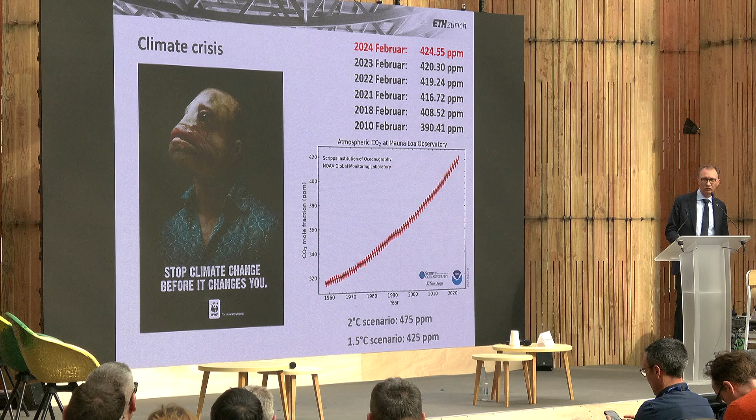But I would like to start with the same slide as Andrew showed previously, and Jose, because this slide is always my first slide. I update this slide every year, so next week I can update again. And if you look at the number, we already reached the 1.5 scenario. I'm sorry to tell you, but this is the truth.

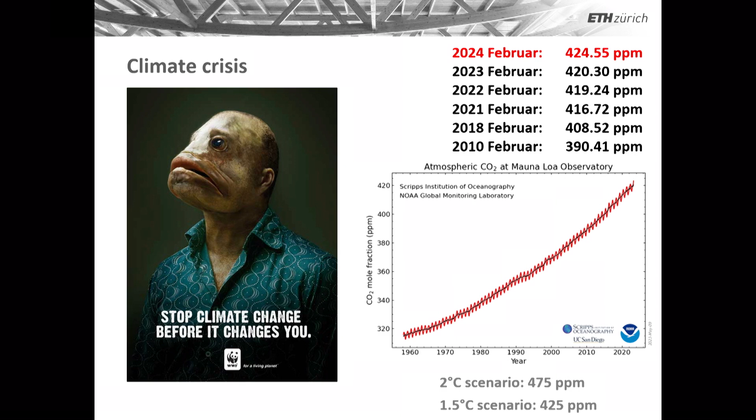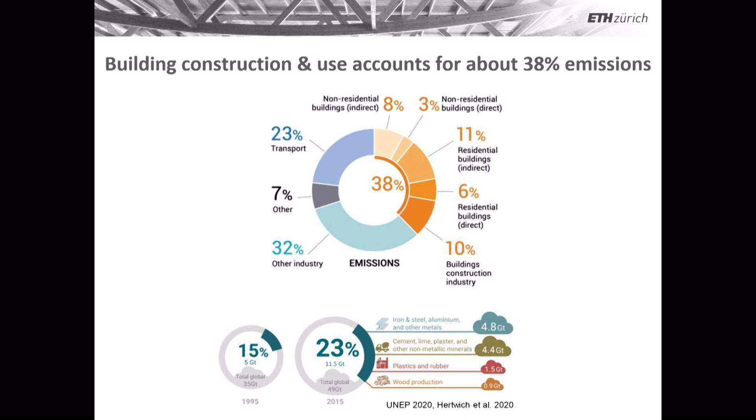You have already seen previously that worldwide, building use and building construction account for 40% of emissions. So we have to work in this sector. And as Andrew showed again, we can do something good if we start replacing concrete and steel with timber. But we have to upscale timber construction.

This is a very nice study done by Built by Nature. We can have a huge impact, but we have to do more with timber. I will not address this point.

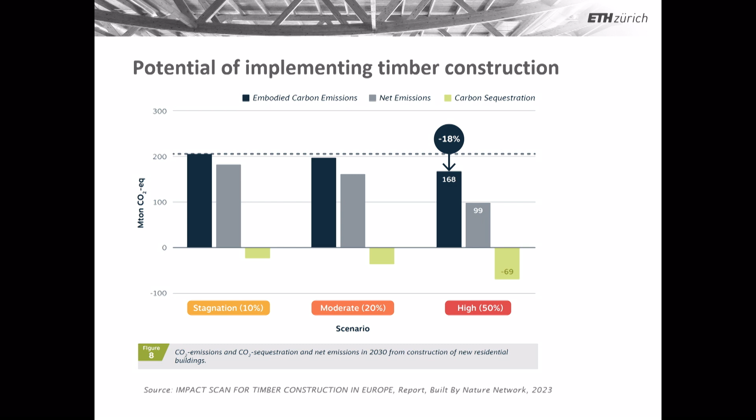Then, of course, if we want to build with more timber, there is the issue with fire. I agree, timber is a combustible material. We built cities for centuries with timber. They have been destroyed. I'm very sorry to say, Los Angeles has nothing to do with it.

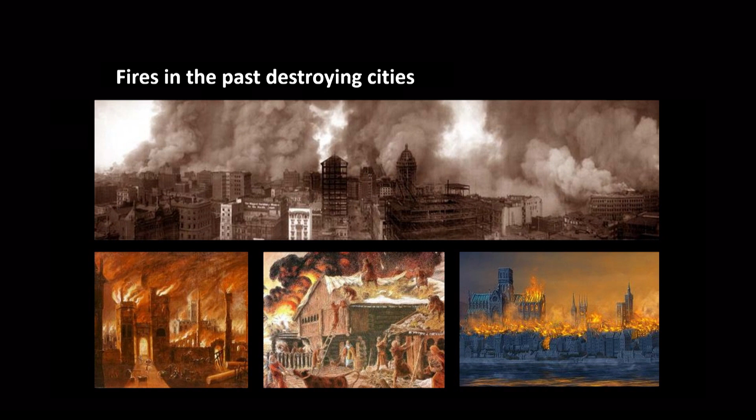You are completely wrong. If you rebuild Los Angeles with concrete and there is a wildfire, you will destroy all buildings again. But I don't want to discuss this point, it's just to clarify a few things.

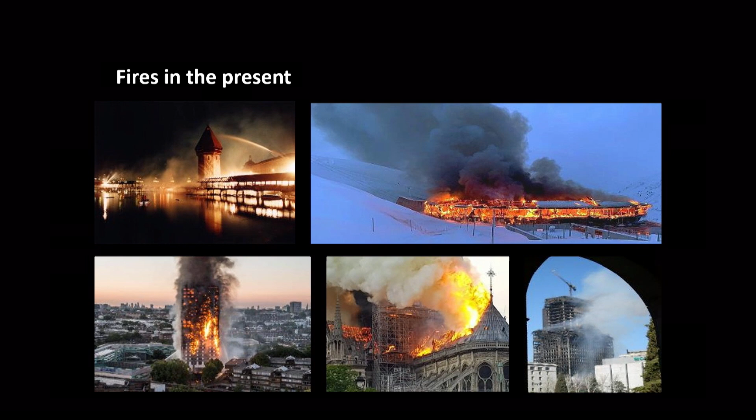Of course, we have also seen fire in recent times. We still have some fires, but we have a lot of new knowledge to take care about this. And as you are doing, and congratulations, what you are doing in France is the right way to go through all these critical points. We have many critical points, and Andrew, what you show me is the right way to address the point and propose solutions.

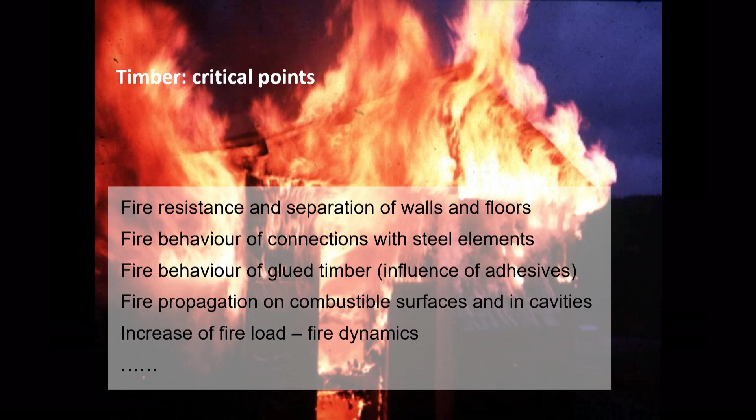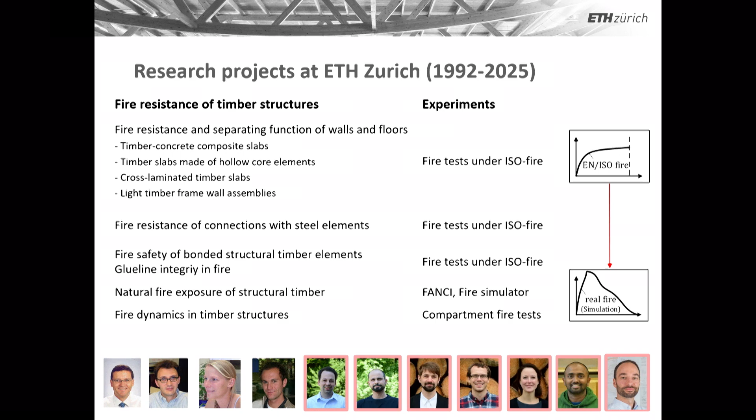And what we have done in the last 30 years, of course, is doing fire-resistance tests, normal fire-resistance tests, compartment fire-resistance tests. We have to understand, I hope, your dear French colleagues can go back also to this work. I don't want to say you are repeating what you have done. It is important, everyone needs to get this knowledge.

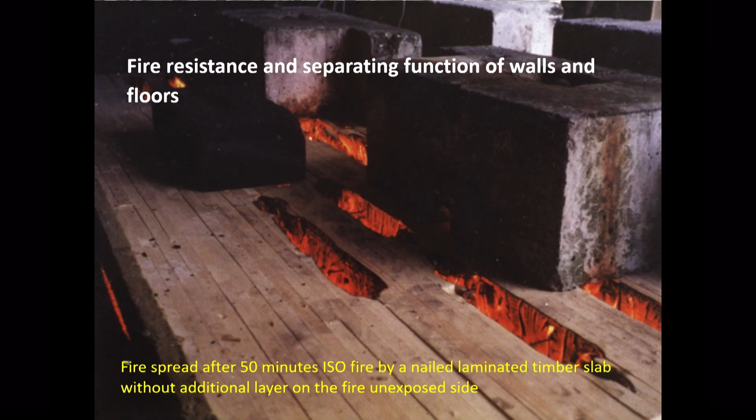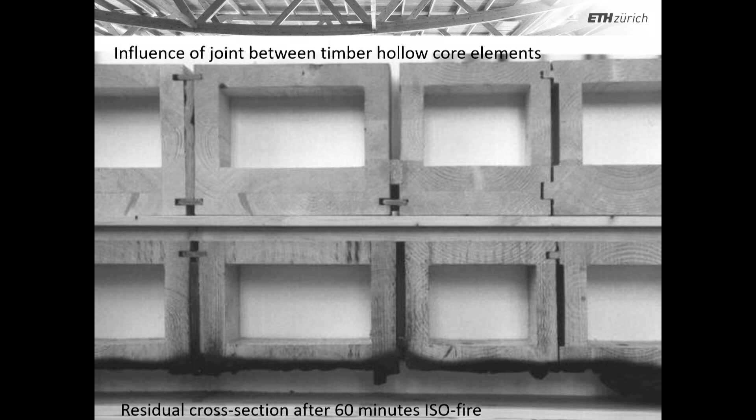And it's not only fire resistance, it's separating function, it's detailing. Detailing should work. Fire is like water, it always finds a way to spread out if you are doing the wrong detailing.

We have been working with all materials, not only timber, also concrete. Now we have clay. It's very interesting to see how we combine timber with other materials. We have to recognize we need hybrid buildings, and probably it's the right way to go.

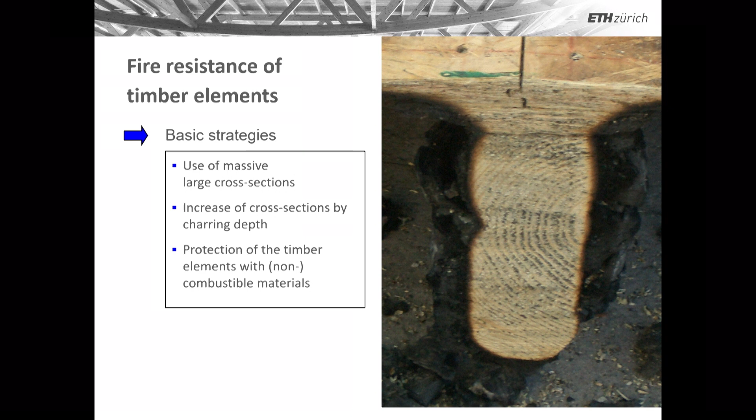But we know now, fire resistance is not the problem. It was mentioned, make the cross-section big, and you have good fire resistance. About cavities, detailing, gaps, and so on, you should take care. You should do this detailing in the right way, otherwise you have a problem.

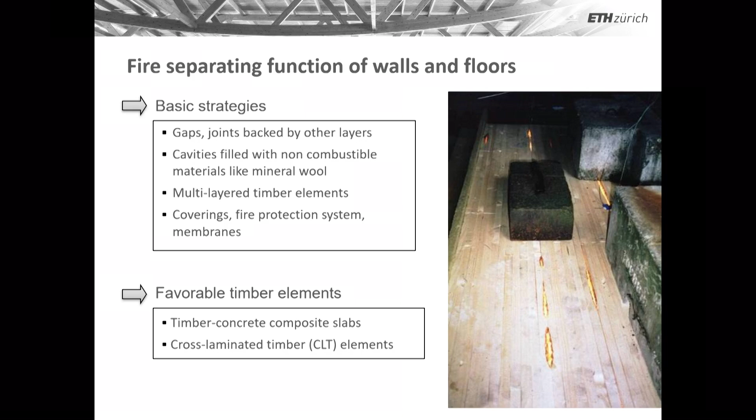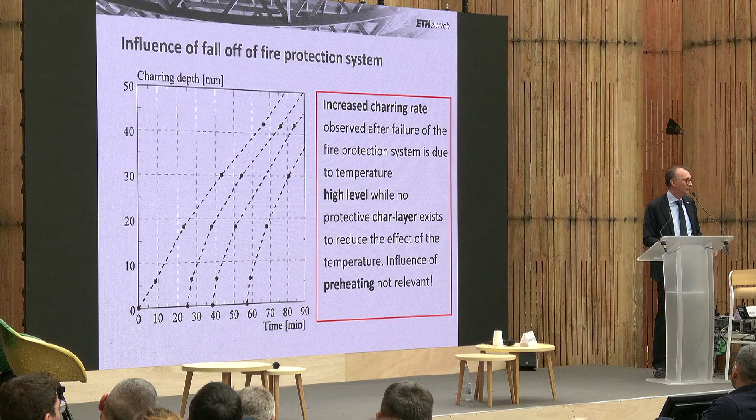We are now protecting timber with gypsum plasterboard. We can discuss if this is a good or bad idea. Sometimes you want to protect with gypsum plasterboard. You have to consider what happens when the gypsum plasterboard falls off. We have an increased charring rate. We need a new charring model to consider this situation, and we have this knowledge.

CLT is the most tested product worldwide. Please don't burn any more CLT, we have thousands and thousands of fire tests. We know how CLT behaves in case of fire, and this was important. It's still a young new product.

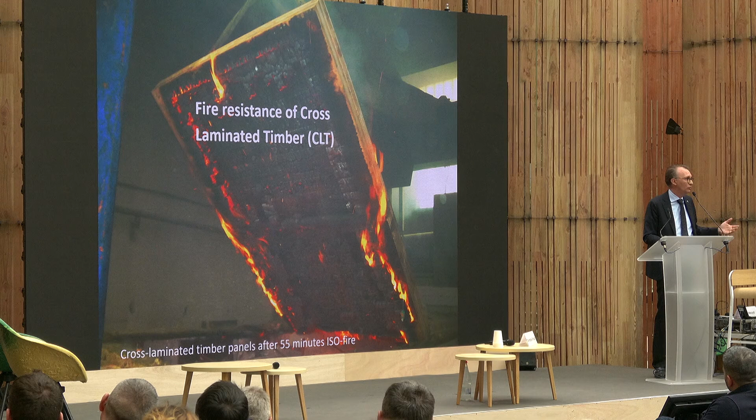And we discovered many years ago there is falling off of the char layer, not only of fire protection. And this causes maybe a second flashover. This causes a problem.

We have to consider this problem. Can you start a movie?

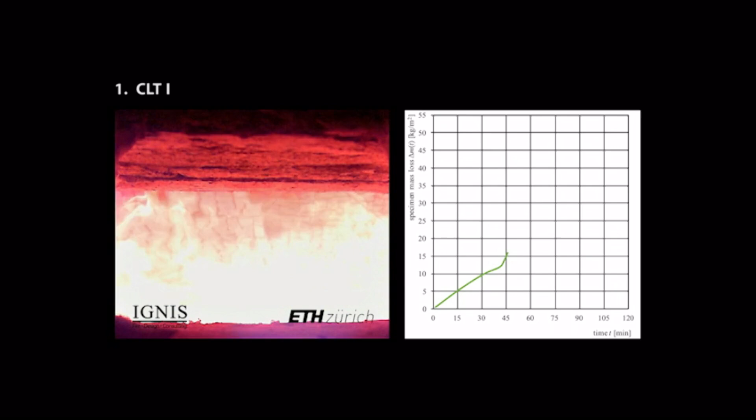Every time that you lose the char layer, the timber underneath ignites immediately. It's not protected anymore from the char layer, and it burns faster. We have a double charring rate. You see in this video, and of course, if there is no falling off of the char layer, CLT behaves like a solid timber panel, so no problem.

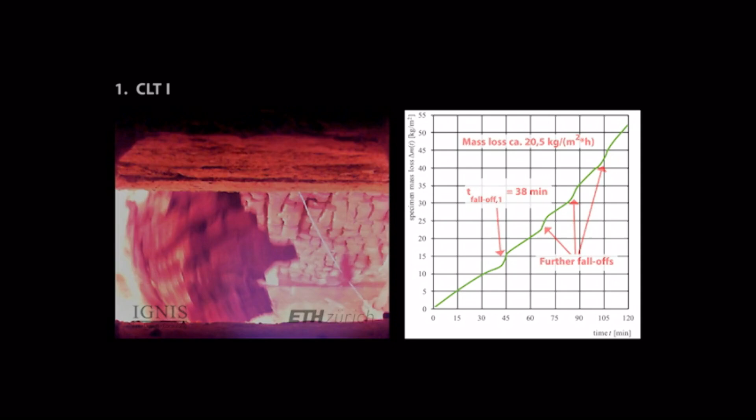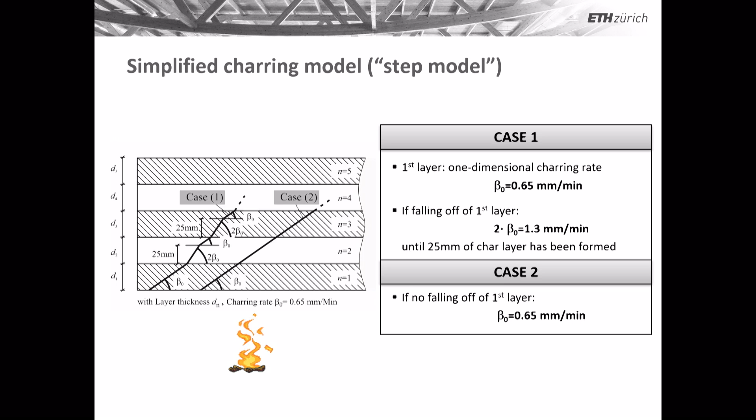But we should also recognize the problem, and then we should propose a solution. The solution is very simple: we use the same model as we are using for the protection system. When the protection system falls off, we have increased charring rate. If we are losing the char layer, we have a double charring rate. So we have proposed the step model, and the step model recognizes the problem, so engineers can consider it.

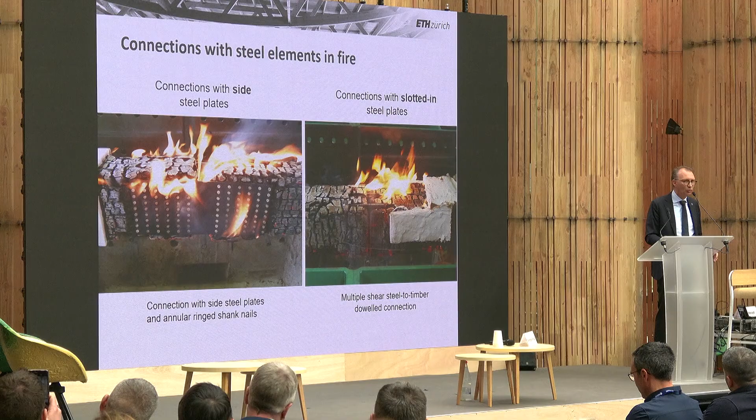In design, there is no timber structure without connections, and we have to be sure that the connection works also in case of fire. I have to say thanks very much, especially to friends at CSTB, to Dhionis Dhima. They have done so many tests in the last 30 years that we now have much better knowledge about the fire behavior of connections, which is important. We know that if we expose steel, it's not good. Slotting steel plates is probably the right way to go, and to protect the steel with timber.

There are other problems, but we cannot address all problems in this short presentation. With timber, what you are doing is amazing - we are going larger, we are going higher. We should recognize a single family house is not like a tall timber building. Maybe a tall timber building should be designed in a different way, should be designed for burnout. We should consider that we are doing something different than what we have done in the past.

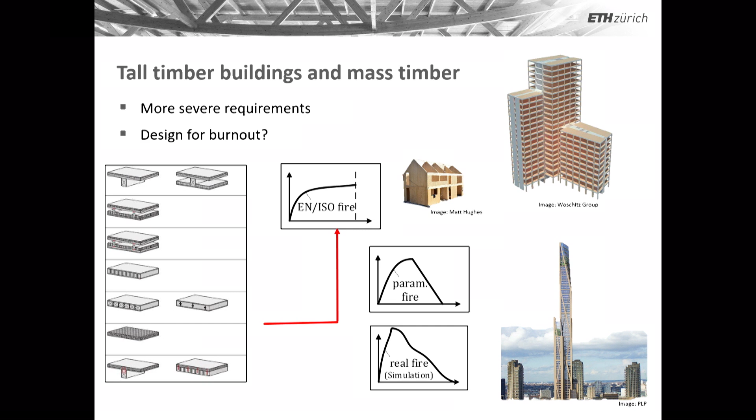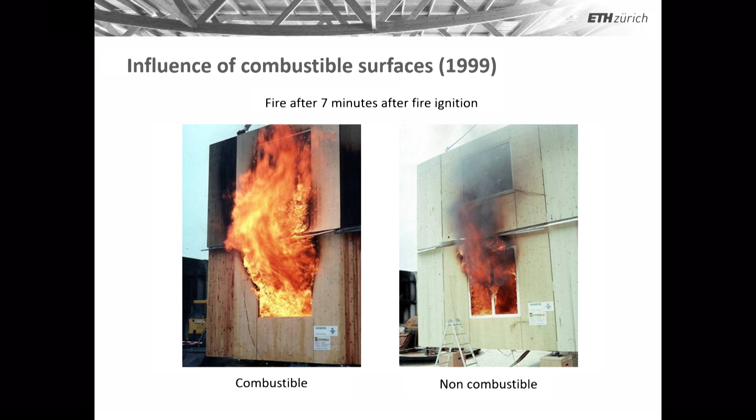In this area, 20 years ago, we did this compartment fire test, already showing that when you have a module completely made of wood, you have a different fire dynamics compared to a module which is completely protected by gypsum plasterboard. We have to consider this aspect too.

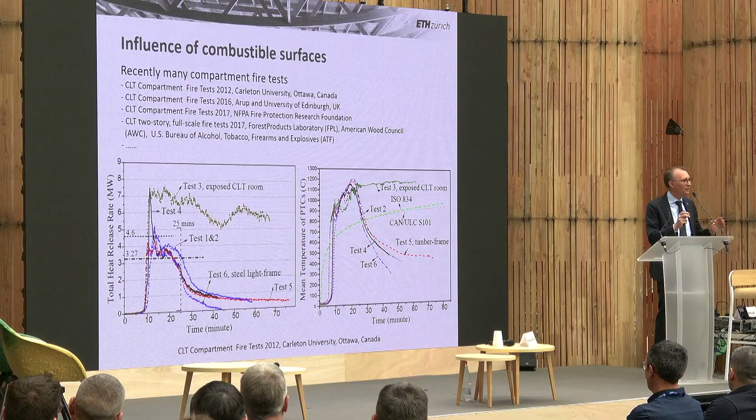In the last 10 to 15 years, so many compartment fire tests in the United States, Canada, France, UK - very, very good. We are getting much more understanding and knowledge. Now we have to translate this into standardization so that engineers can calculate.

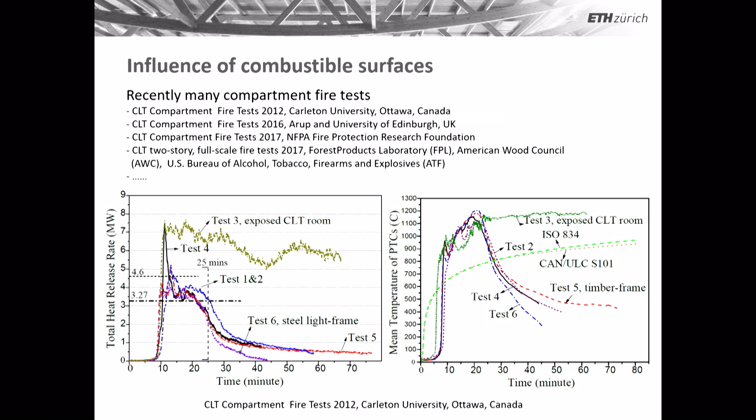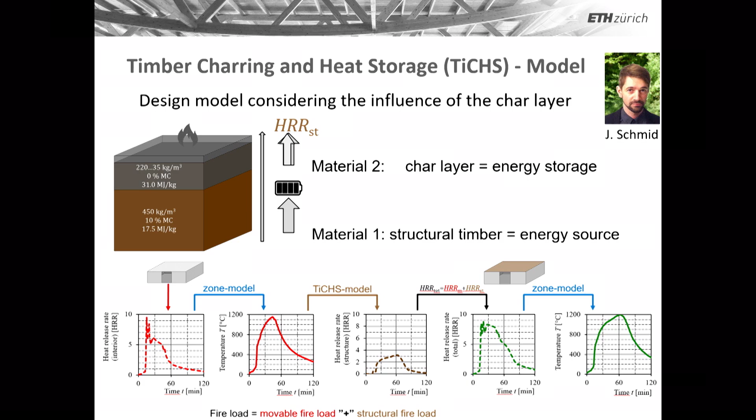At ETH, I see the author, Joachim Schmid, with his PhD. We now have a model which allows us to consider wood as an additional fuel load, but there are other models developed now that we can start using to design timber exposed to a natural fire, not only to the standard fire.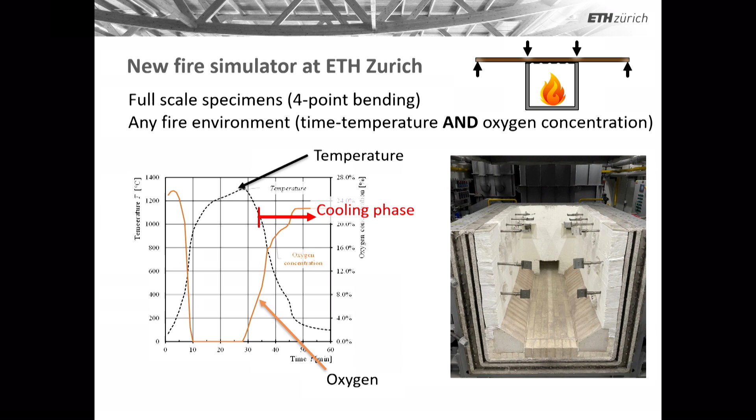The new fire simulator is small but very powerful. In our new fire simulator, we can simulate any kind of fire and environment, meaning not only the temperature but also the oxygen. You see in the graph, we can adjust the temperature in the furnace through the growing phase, fully developed phase, and cooling phase. At the same time, we can adjust the oxygen content, considering that in the cooling phase we introduce oxygen, and then we see how the timber starts maybe combusting, charring, smoldering more, and so on.

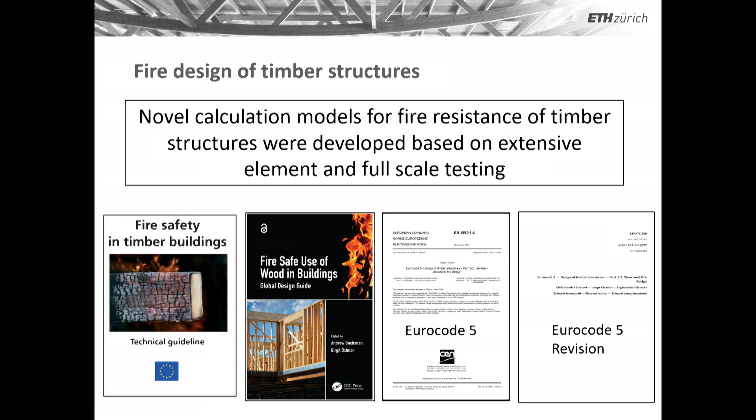All this knowledge has been translated into guidelines, but it's also translated into the new Eurocode 1995-1-2. You will vote now in April - all countries, there is the formal vote of all Eurocode 5 timber parts, including the 1-2.

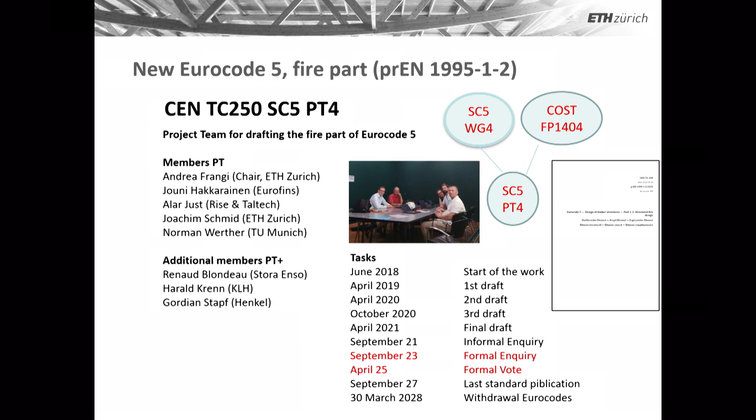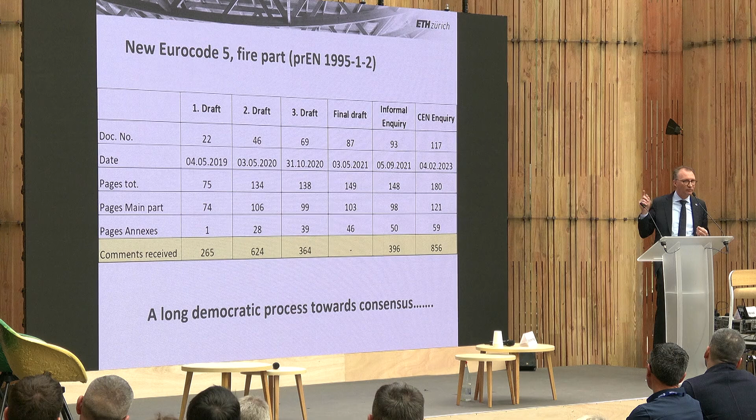This was developed over the last 10 years, and I'm proud that it was a long process - a long democratic process. We went through 6 inquiries. When I'm chairing this group and I get 856 comments, it's not that I'm so happy, because we thought, come on, we've provided you the best code. No, we restart, we go through the code again. It's important that what we have now in Eurocode 5 is recognized as state of the art. And it's not the state of the art of Andrea Frangi - it's a long democratic process.

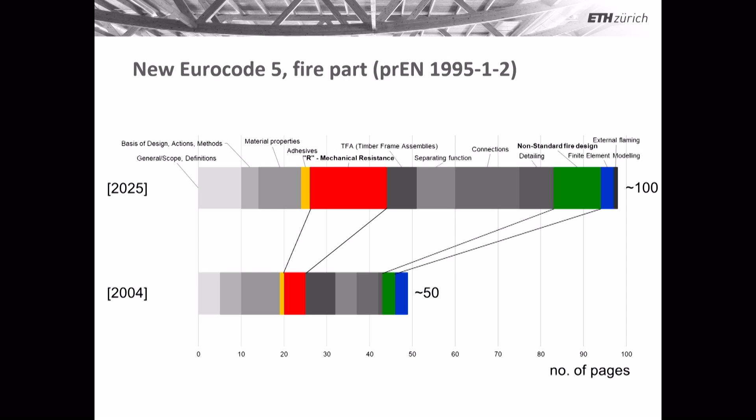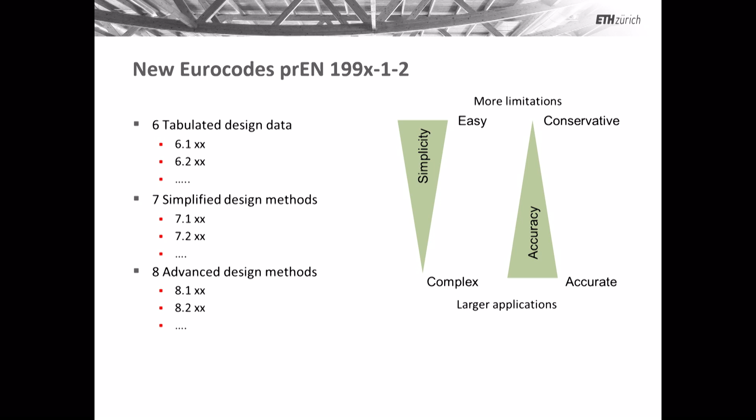You have much more pages to read, but we have 20 years more knowledge to standardize. So yes, you get much more to read, but we cover much more, and we give you different levels of design in timber structure. You can go for a simple table, do a simple calculation, or go for an advanced model, depending on the case you are working on.

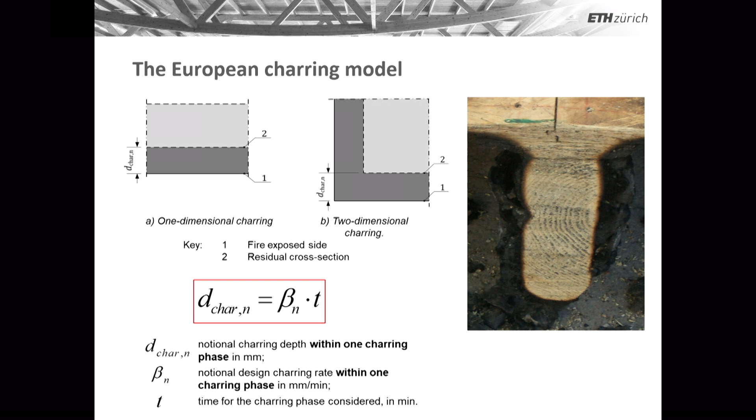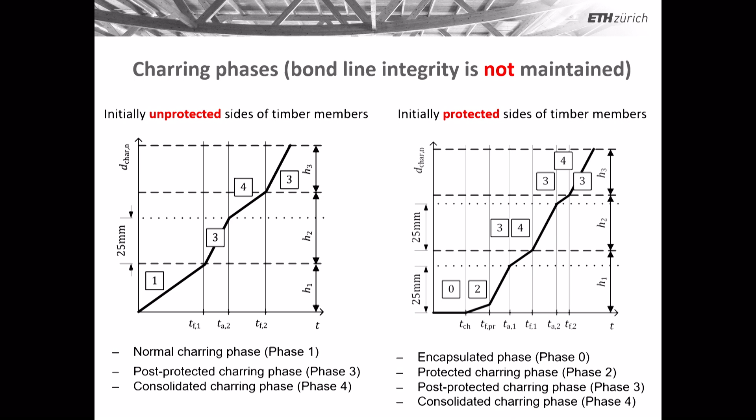The European charring model was extended and revised so that you can now design with this simple model all timber structural elements. We have distinguished elements that fulfill bond line integrity, with no falling off of the char layer, from products that do not fulfill bond line integrity. So we really now have different models for different situations.

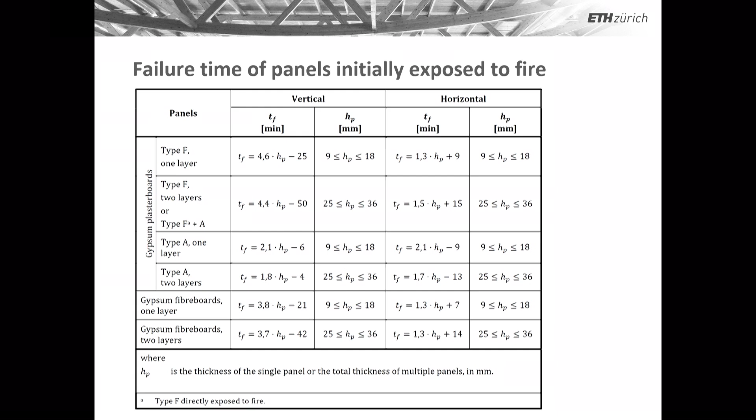And then, of course, gypsum plasterboard and any kind of fire protection system. Now, for the first time, you have a generic equation. Of course, a company will always give you a better value because they have done testing and certification, but in a preliminary phase, now you have a generic equation. You can calculate falling off, and you can calculate the failure time of the fire protection system, which I think is again a very good improvement.

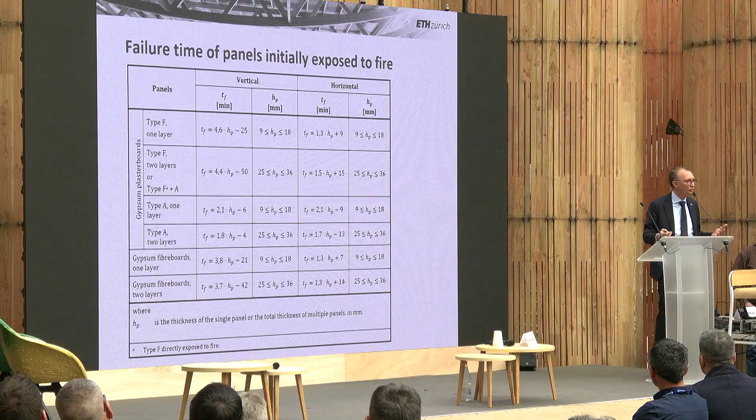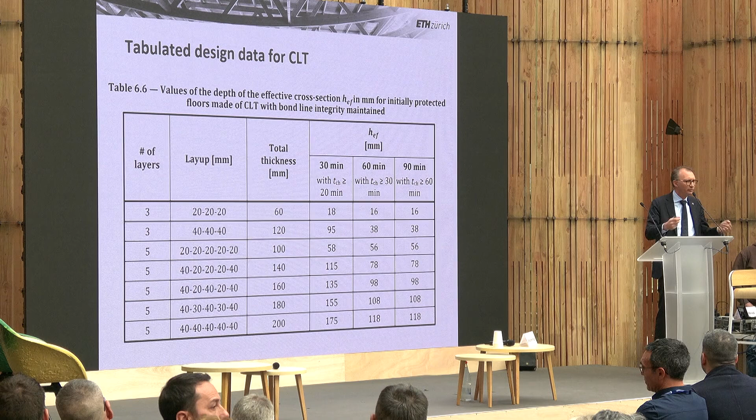And if you don't want to calculate, pick up the table. We have prepared tables where you just have to read the value. And for CLT, which is a little complicated, again there are tables. You don't have to calculate, just read the table and you get what you are looking for.

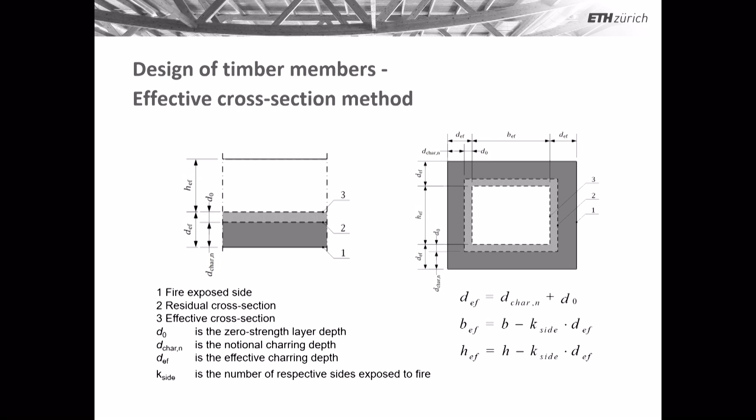I already mentioned the effective cross-section was revised and extended to all kinds of structural elements. It's a simple model, and we have also revised the zero strength layer. It's not 7 millimeters anymore. Forget the 7 millimeters, it was wrong. We have to recognize other values, but I think it's the state of the art that we now have in timber engineering and fire.

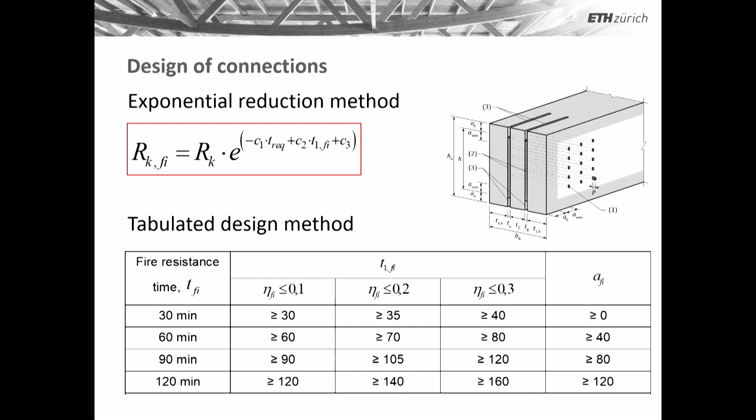For connections, I have to say we really extended the rules up to 2 hour fire resistance, not only half an hour. So for common connections, you now have good design models, simple models based on tables, or some more empirical, analytical models that you can calculate.

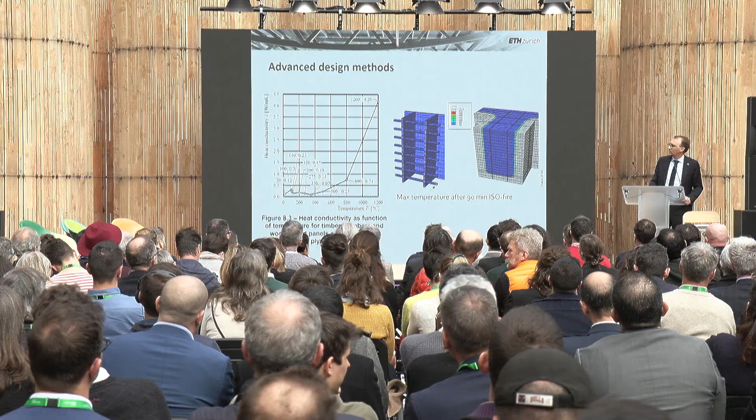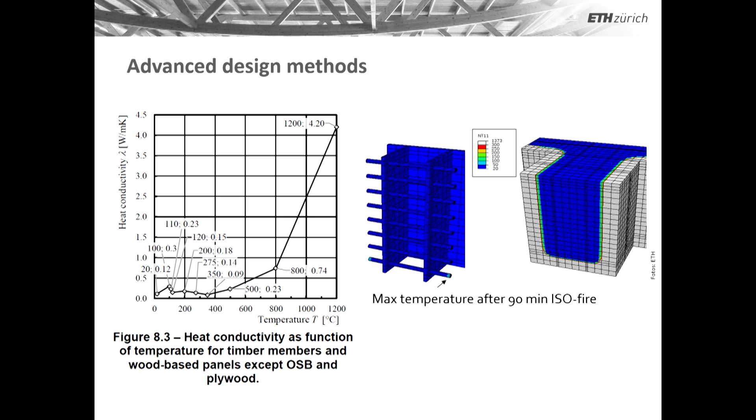Advanced models: sometimes we want to do a numerical simulation, a thermal analysis combined with mechanical analysis. Then you need a lot of information and expertise. We try to give this knowledge, providing the properties that you need for this kind of simulation for all materials, insulation, gypsum, timber, clay, and so on, so that you can start if you want to go a little further into advanced calculation.

Detailing, I have already mentioned. We cannot provide the 1,000 pages that you find in Switzerland or now in the UK with all the detailing, but we give at least a few pages with the most important principles. You have to fulfill this if you want to use the previous equations. So it is very important that detailing is connected with the calculation model.

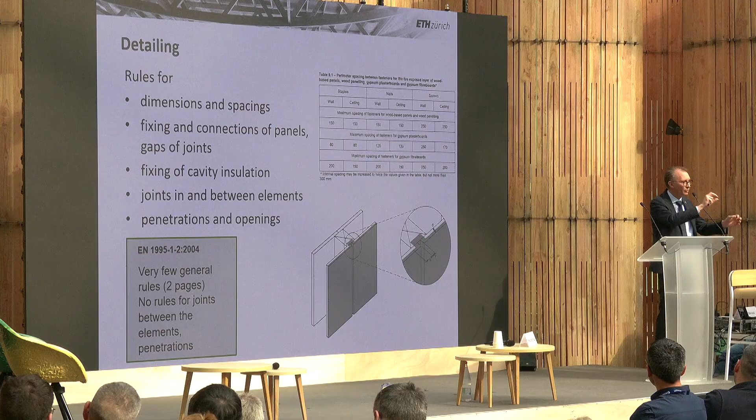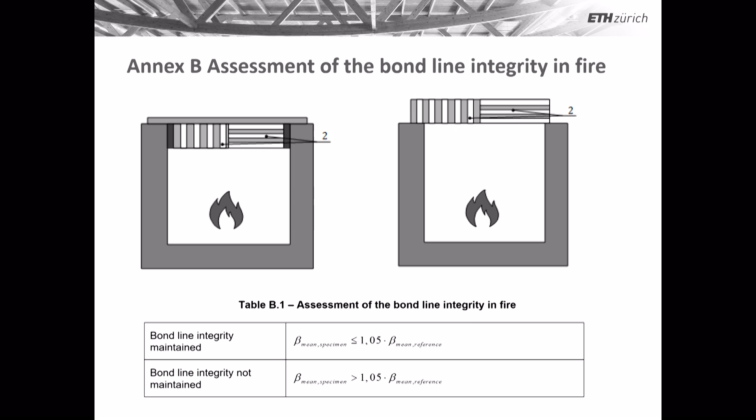We introduced Annex B, normative. I repeat, normative—you cannot do what you want because it's normative. This allows, with a simple test, to say whether bond line integrity is fine or not, and we also have a very severe criteria. So if you pass this test, you can say bond line integrity is fine. And of course, this is only an annex, but it is a very important annex. You will hear much more this afternoon from Daniel Brandon, who is coming here.

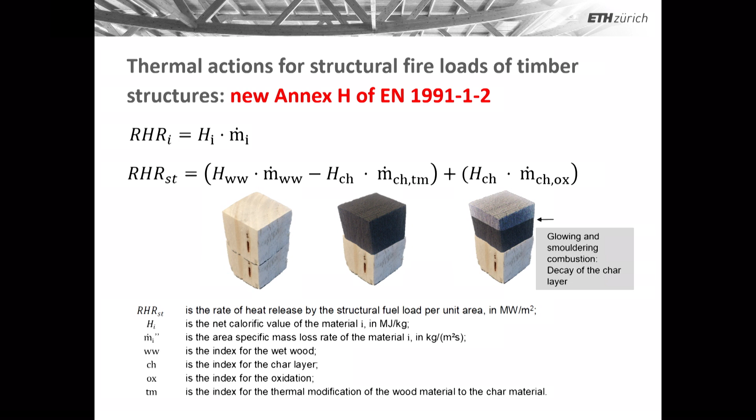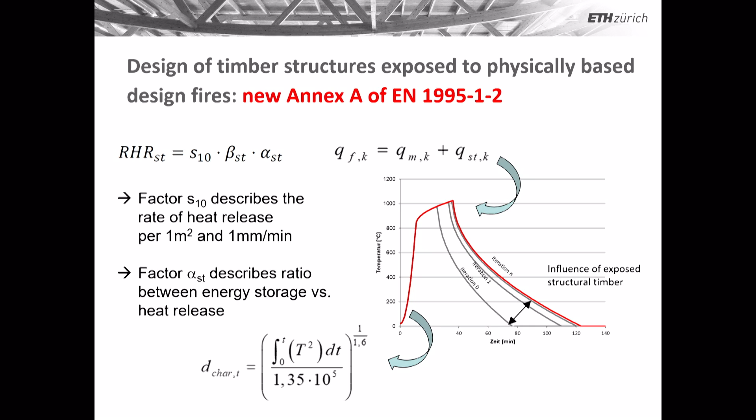Now I see Joachim, there is Luke Bisby, and so on. We now have the first instrument to go beyond the ISO standard fire exposure. We introduced in Eurocode 1 the basis for this calculation, how you can consider timber as additional fuel, and in Eurocode 5 you have even two models showing how you can approach this problem.

So feel free to start using the second generation of Eurocode 5. It will be available this year, and then, of course, all countries need some time to prepare national annexes and additional documents. But I think the second generation of all Eurocodes, not only timber, is really a huge improvement in standardization.

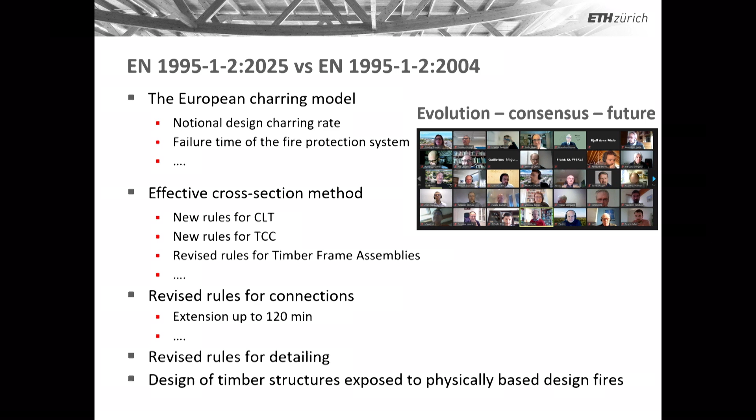And I will not live the third generation—it takes 20 years for each generation, so imagine the time we are spending on this standardization. I'm proud that we calculate in the same way, but with regard to requirements, each country is doing it in a different way.

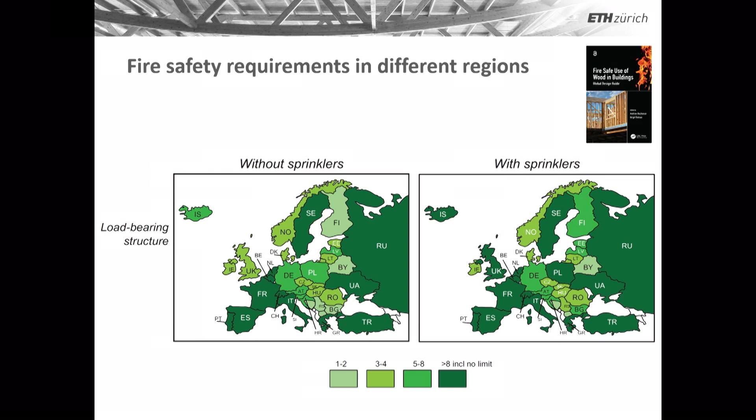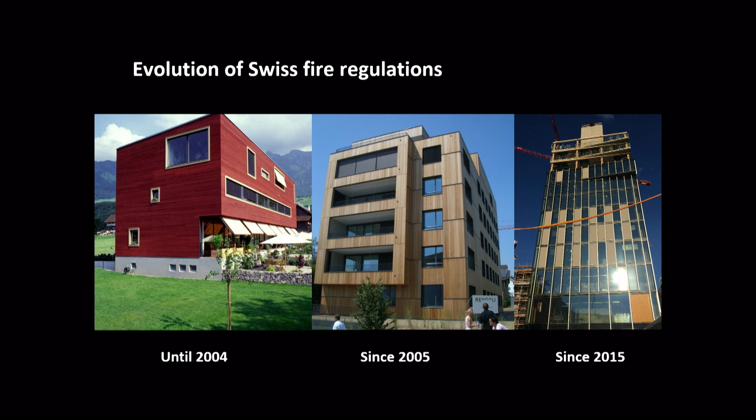This is the reality. So the next step is to try to have more harmonization in the requirements that we set. And I would say, luckily, I live in Switzerland, which is the most liberal country. We have the best fire safety regulation worldwide for timber structures. But this was not the case for the last 50 years.

Until January 1st, 2005 in Switzerland, you could only build a building with 2 stories. But I mentioned we have been working with fire brigades, with authorities, with industry for the last 40 years, 30 years. And the authorities recognize we can build fire-safe timber buildings. Now with the new regulation, we don't have any limit for timber as a building material.

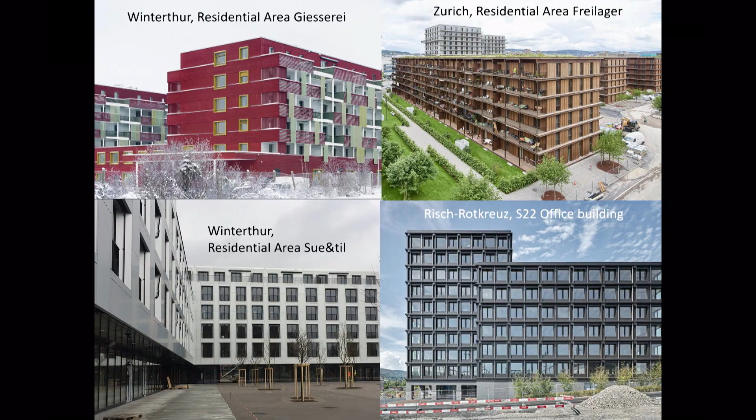And what we are doing for the last 20 years in Switzerland, we are really implementing the knowledge. These multi-story timber buildings in the city of Zurich, Winterthur, Basel, Lausanne are not a single family house in the mountains. These are residential areas for Switzerland. 500 apartments is huge. Of course, in France it's nothing. We are a small country.

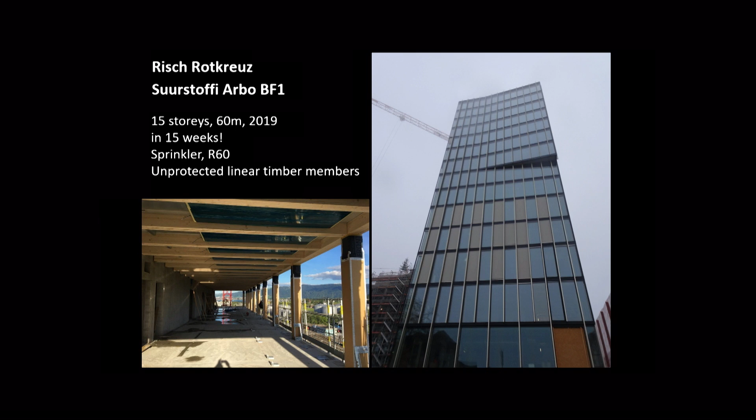But it's just to show you what we are doing. This is the state of the art. Medium-rise buildings up to 30 meters, we can do and we shall do. And now, of course, we have the competition for tall buildings. That's good. Ferrari in construction, let's say, Formula One maybe. Ferrari is just one company. But this is important because we want to also go beyond maybe what we can do as a normal basis.

Now this is one of the tall buildings in Switzerland, 60 meters high, 15 stories. Built in 15 weeks, so you cannot be faster. And the fire requirement: 60-minute fire resistance with sprinkler, exposed linear timber members. You enter the building, you see the timber.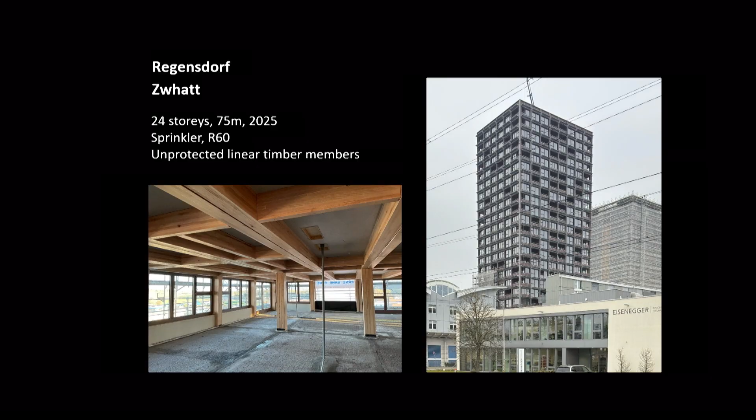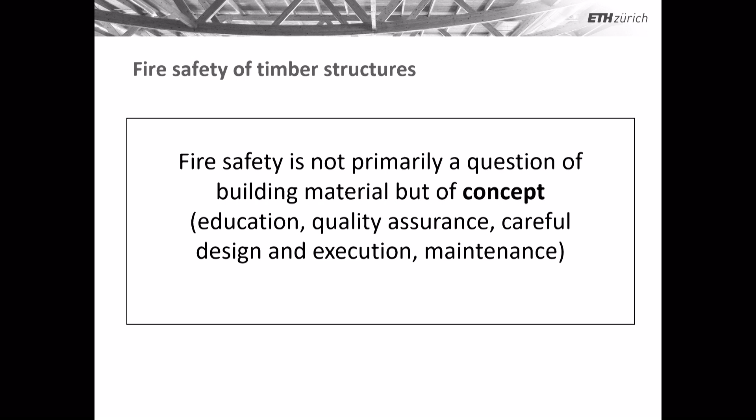Fire safety, dear ladies and gentlemen, is not primarily a question of building material, but of concept. And with concept, we mean education, quality assurance, careful design and execution, maintenance. This is our concept.

Education is important. I'm at ETH. We have now started a new MAS in fire safety engineering. We recognize we have to educate more, especially the engineers who are now in practice. Maybe the students can catch up, but more so the people who are in practice.

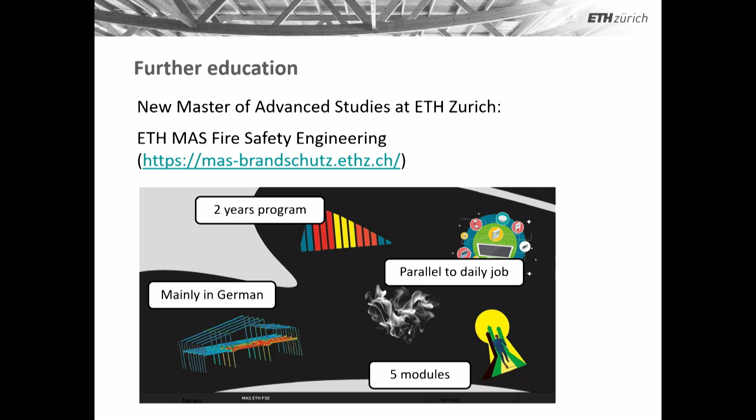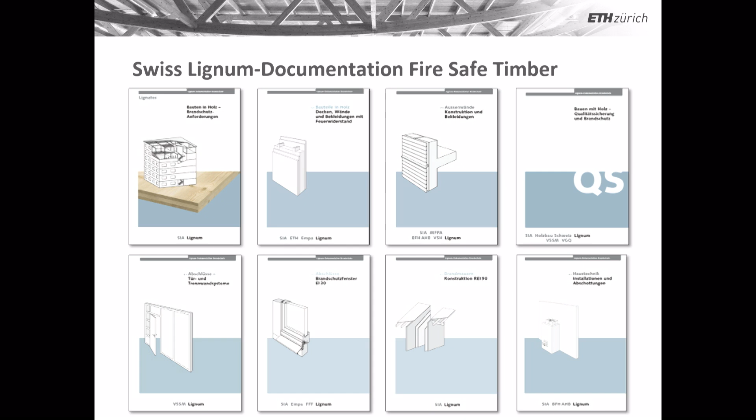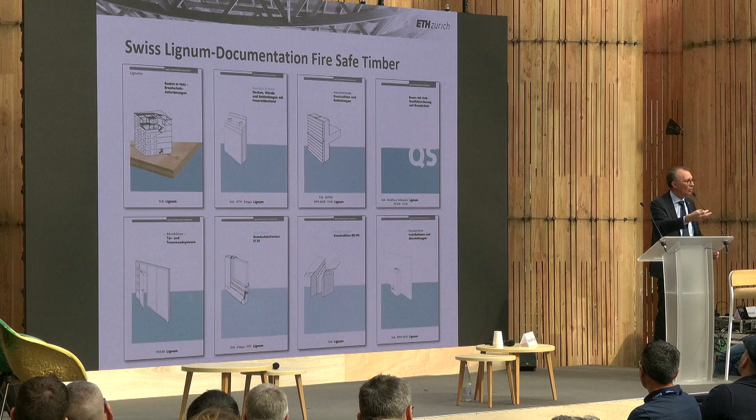The documentation that you are doing in the UK, I think is really the right way. We have something similar in Switzerland, the so-called Lignum documentation, covering all aspects, and fire resistance is only one very specific aspect. Detailing, again, so important, execution, and so on. And for the French colleagues, you have this also in French. So maybe you can copy a few things, I hope so.

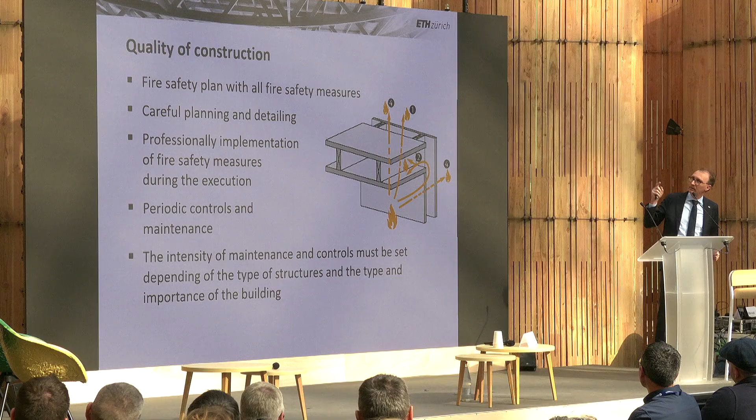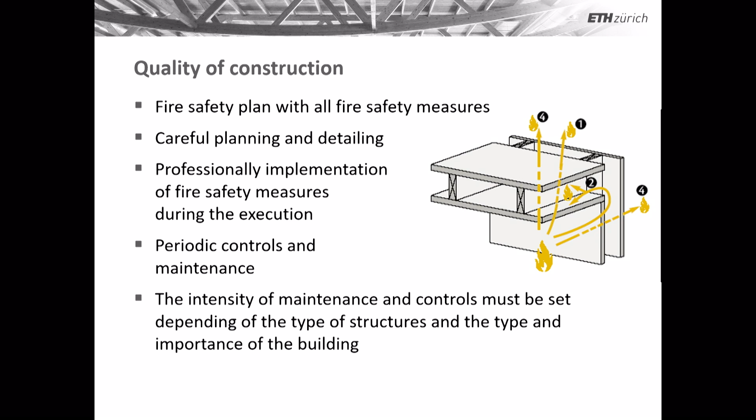Quality of construction on paper is always perfect. Somebody should check that you are doing the right things also on the construction site. In Switzerland, we have the so-called fire safety engineer, a person who takes responsibility that what has been designed is also executed. He goes into the factory, checking that the timber frame assembly is filled with mineral wool, if needed, and not with wood fiber.

So you have to check before maybe the elements are done. And then you check what happened during the construction site. Is it done in the right way? Yes, otherwise you ask to fix the problem.

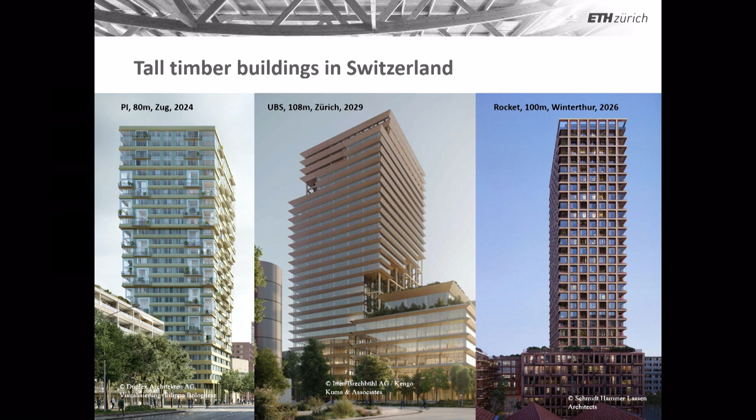Feel free to come visit us. The small neighbor country, that's what we can offer you in a few years. I just want to pick up the tall timber buildings that are under planning. They will be finished in the next year. We go up to 110 meters, and we will go even higher, and we will go with timber.

Because we like cheese in Switzerland. We export cheese, and we are proud about the quality of our cheese. And the Swiss cheese approach is our approach for fire safety. Fire safety is not a question of building material.

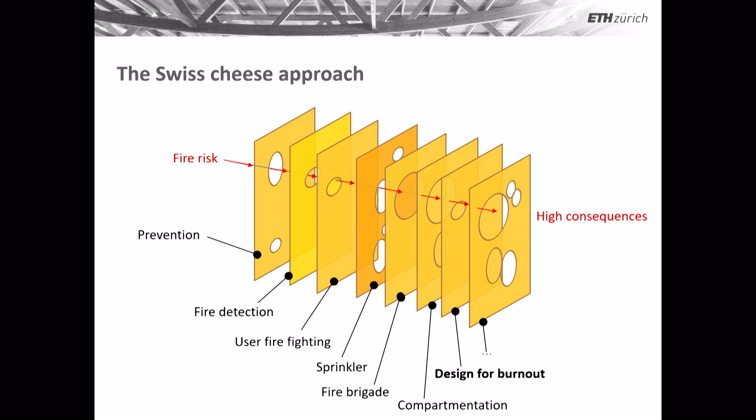And it was already repeated many times, also by the previous speaker. You have to consider many measures, starting from detection, or even prevention, which is always the cheapest way to solve the problem. There will be no fire. And by adding all these measures, we can build fire-safe timber buildings in Switzerland. Thank you very much for your attention.